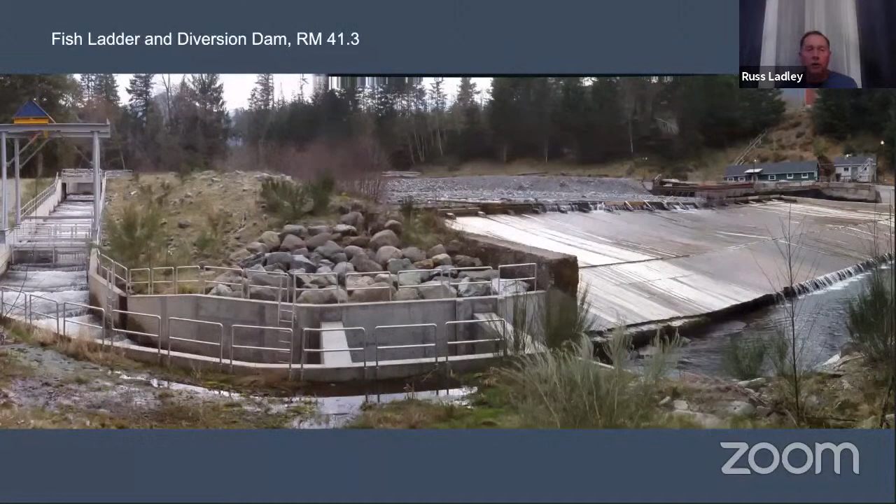So the timber crib structure you see to the right is the original dam design dating back to 1904. The fish ladder on the left was added in the year 2000 as a result of a settlement between the Puyallup Tribe and Puget Sound Energy, the original owner of the project. The project was since sold to Electron Hydro about 6 years ago. The elevation of the structure, by the way, is 1,600 feet.

It's surrounded by industrial forest land, in this case, mostly Hancock timberlands. It's not a place where you can take the family on a car ride and go see unless you have an access pass on private timberlands. And it's all through a maze of logging roads.

The diversion dam is just that. It serves to divert 400 cubic feet a second of water into this flume shown here, which then conveys that water 10.1 miles along the valley wall downstream. Next slide.

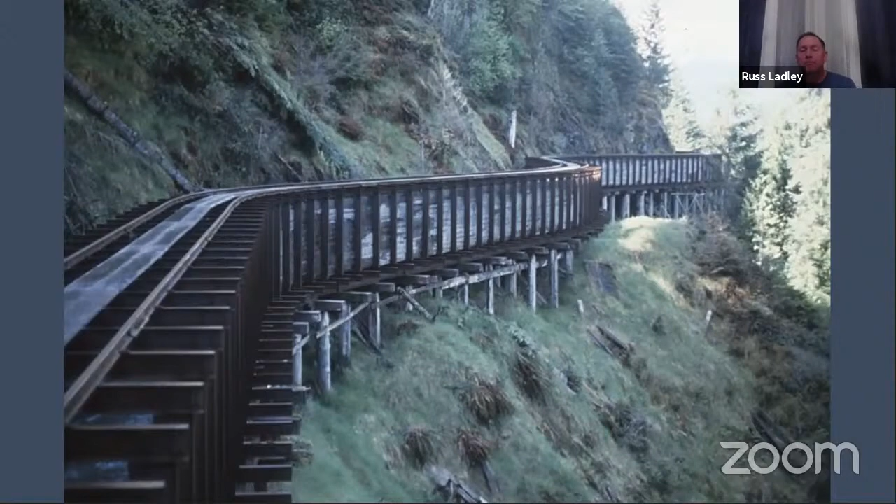Of course, when you're diverting 400 CFS from the river, you're also diverting all the fish in the river. The 400 CFS is about 78% of the flow of the Puyallup River at the point of diversion. The average flow is 525 CFS. Imagine trying to get a permit to divert 78% of a river today. Would not happen, especially a river with 3 listed species in it: bull trout, steelhead, and Chinook.

So anyway, the fish enter this, and since that settlement dating back to 1997, we've attempted to salvage those fish and safely take them downstream via this fish collection facility. It works, but it doesn't work well. We've done a number of tests. Puget Sound Energy also funded a test, and the success rate or survival rates vary markedly, anywhere from 5 to 80%. We know survival is a function of the diversion rate.

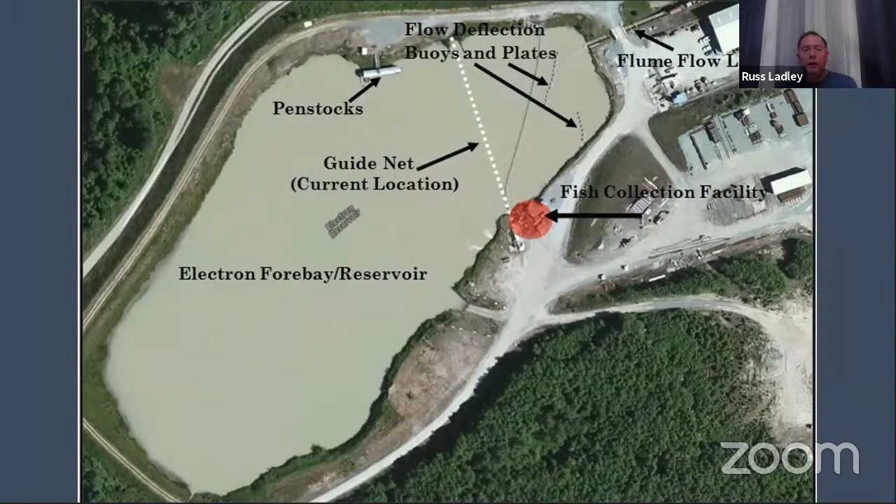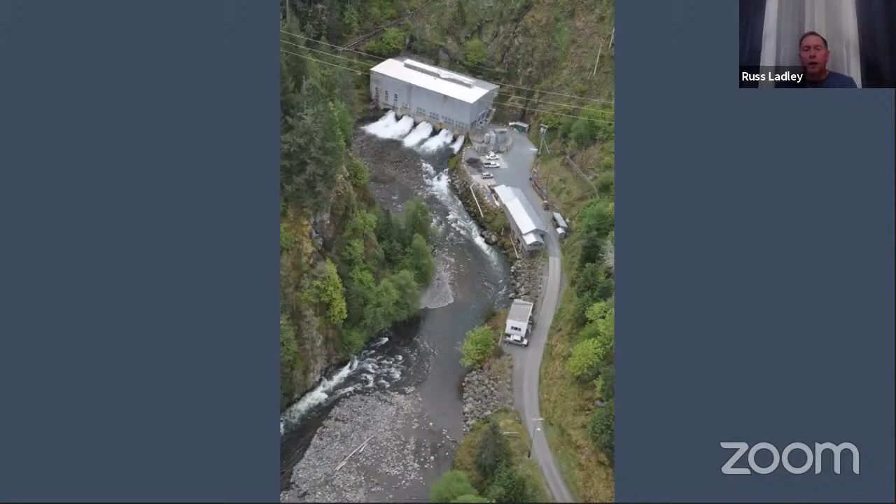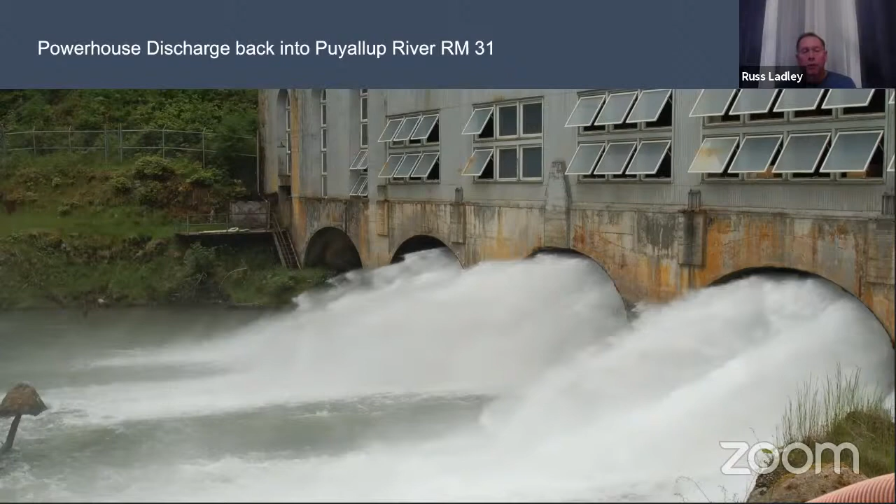You're looking at the discharge again. Fish can be attracted to this. Certain times of the year, you can see schools of salmon here. Oftentimes coho will wait for a freshet event before migrating upstream.

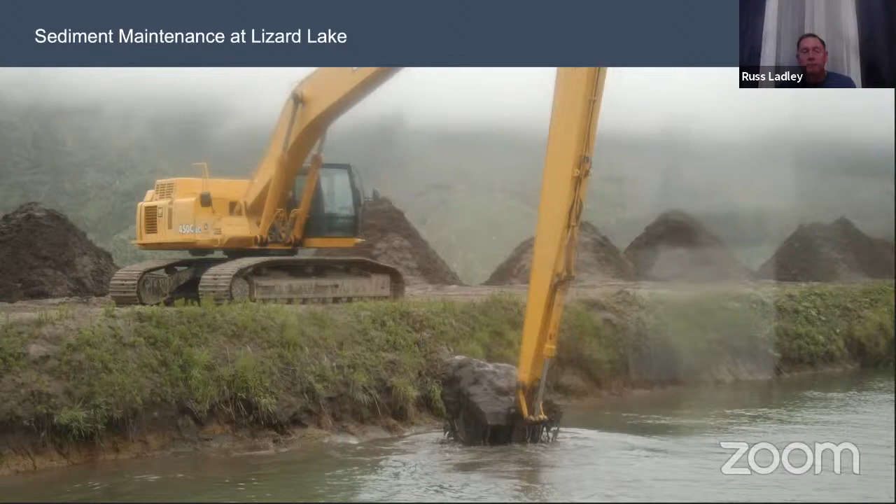Next slide. So those piles are then distributed in a storage yard with a very large bulldozer.

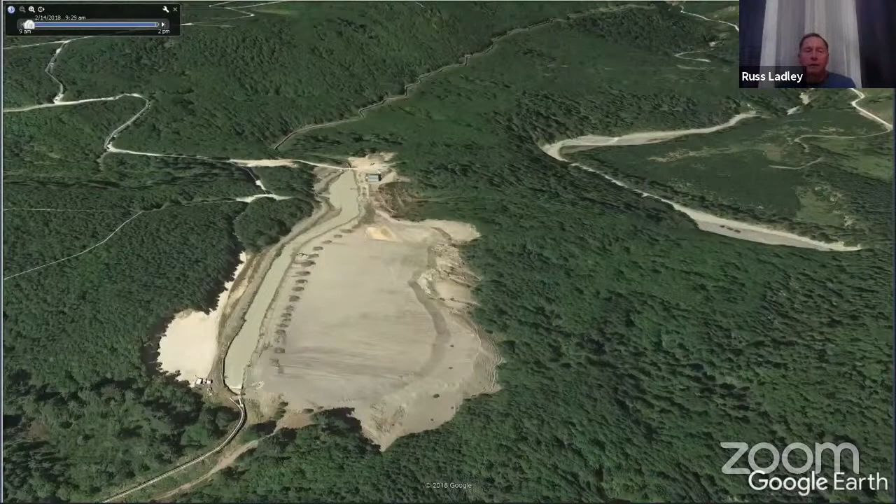That's the Puyallup River off to the right. Next slide.

Getting back to the forebay, we've wrestled with technologies trying to improve survival and catch as many of the fish that end up in the forebay as possible. But it's always a battle. The net used as a guide barrier tends to foul up—it can biofoul in the summer with algae, and after windstorms you get a lot of blowdown material, fine organics that collect on it. During periods of heavy sediment discharge, it can actually weigh down the net and fish get on the other side routinely. So that's part of the battle we've been facing.

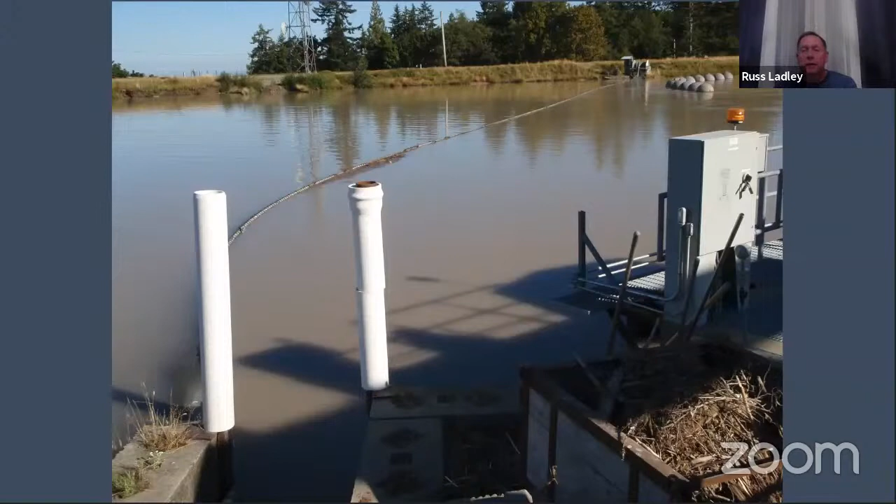Next slide. The net requires a staggering amount of maintenance depending upon the season and windstorms, but this is a device just used to clean it. They can use a water monitor, a high pressure hose, to clean it off, and then pull it back and forth along these spools so that you're using new pieces of net, similar to a purse seiner almost, while you clean another section.

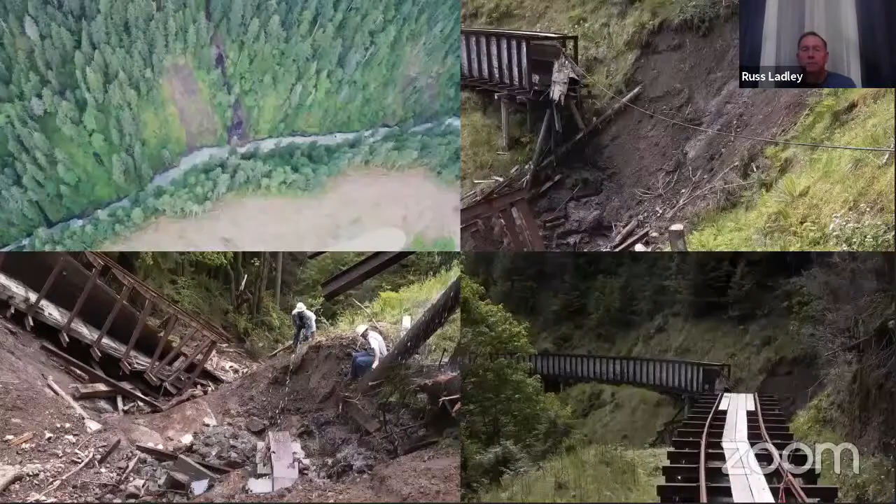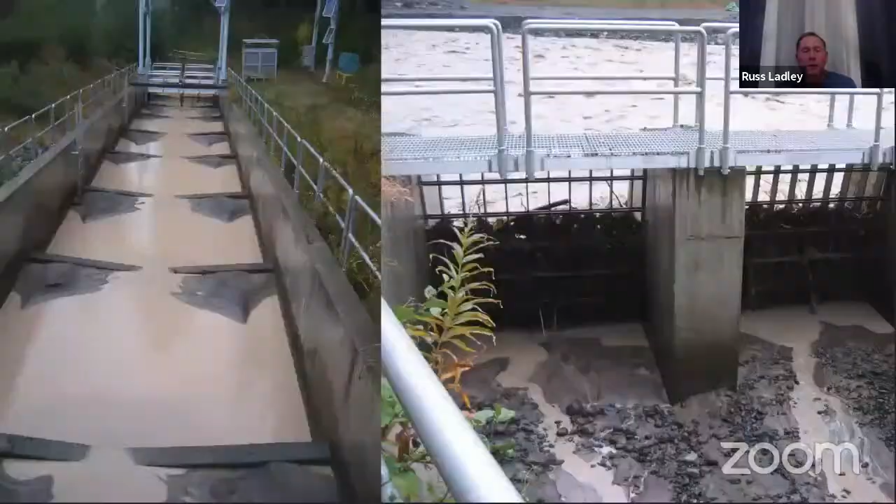As you can imagine, that steep section of the flume has to travel about 5 miles along the gorge length. Periodically you'll get slope failures—a tree will fall down, a large rock will come loose during a windstorm or a rain event—and it takes out the flume. At that point you have 400 CFS still moving through the flume, suddenly barreling down directly to the canyon below. When you fly the gorge, you can see the scars from flume breaks that date back over 100 years. It's pretty remarkable—obviously a very hazardous work environment if you're one of those people that has to do the maintenance.

Back to the fish ladder. It was designed to operate ideally with 10 to 50 cubic feet per second. It's a modified chevron weir structure, which basically provides fish passage without any sediment in the cells, or can act as a roughened channel when following a large flood event, for example.

The ladder becomes full of gravel and sediment, which is what you see here. In this case, the trash rack at the top of the fish ladder is blocked by organic debris and requires periodic maintenance. So we'll get up there, and the project owners also share the responsibility of ensuring water is flowing through that ladder. If there's no water flowing through the ladder, then there's no fish passage, and fish passage must be required. Next slide.

Here's the forebay penstock—they call it the raker shack. In front of the penstocks is a bar screen setup. The bars are spaced 1 inch apart.

Any fish less than 1 inch wide, which typically corresponds to a fish length of about 200 to 250 millimeters, 25 centimeters, depending on the species, can be lost to the penstocks. In other words, any fish smaller than a couple-year-old steelhead smolt can be pulled into that facility where they're running through a Pelton Wheel.

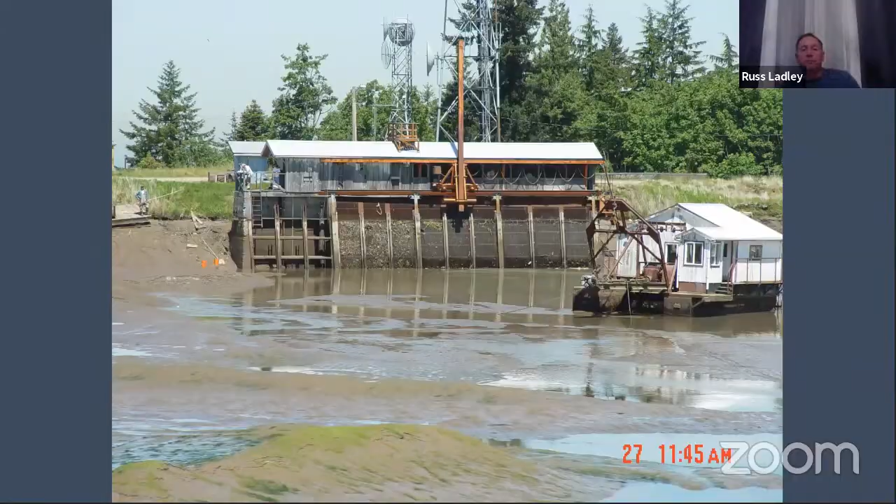Another view of the bar screens. You can see the liability of this design, allowing all small fish to simply pass through. Because of all the slime and sediment that deposits there, the work environment is brutal—collecting fish is a struggle. Unfortunately, most of the smaller fish get through, and you're left trying to salvage basically fish over 8 to 10 inches, which is what we end up with.

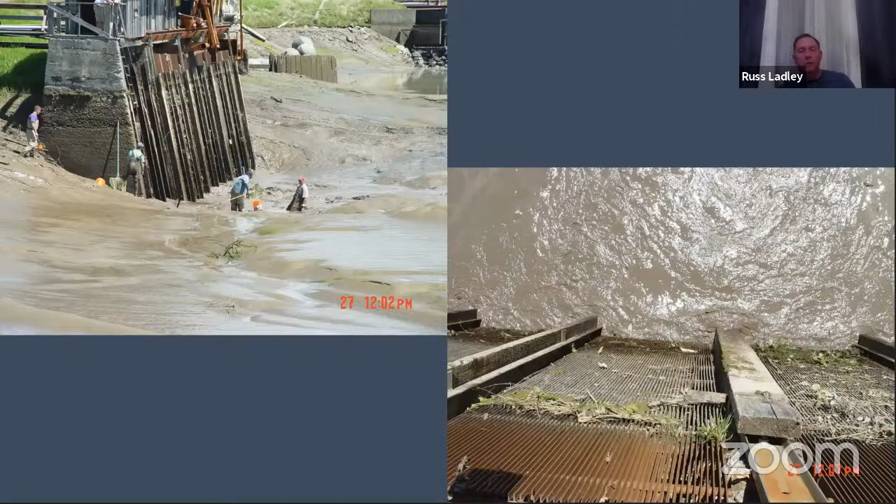In the case of Electron here, we have 873 feet of head. When the water exits that discharge nozzle, it's traveling at about 230 feet per second.

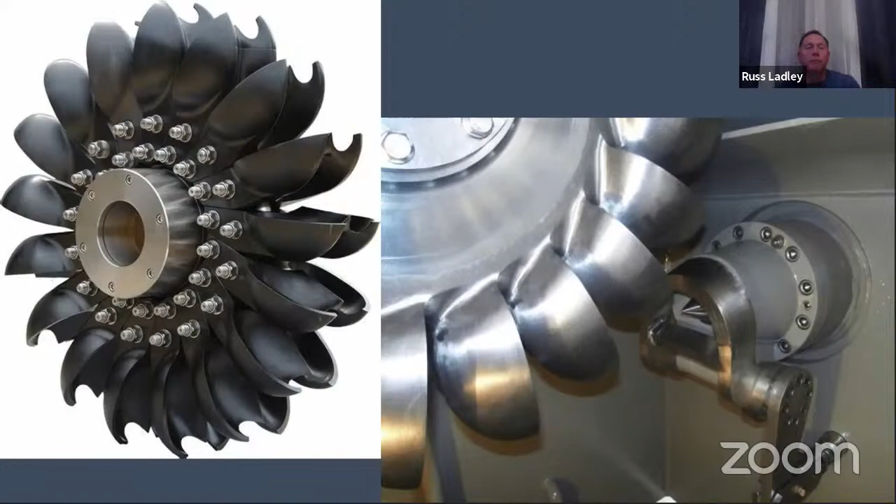I'm sure most of you have heard about improved survival of smolts at hydroelectric facilities. That's all well and good—it's a true fact, and a lot of improvements are coming online in the last 10 years. But just know, when you're talking about survival of fish through a hydroelectric facility, it's always in reference to either a Kaplan turbine system or a Francis, never a Pelton Wheel. The velocities associated with a Pelton Wheel system mean there's no survival—there's no way to survive that.

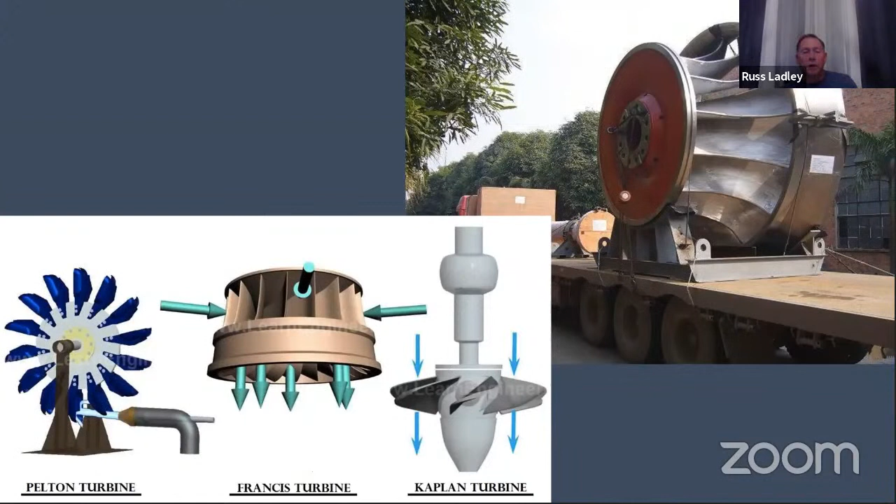The difference primarily is that water in a Kaplan or Francis is moving through the vanes, imparting energy through that movement, and the fish travel through around the blades—unlike a Pelton Wheel, where the nozzle is shooting directly into a steel blade.

So now I'm going to jump into what the current owner is doing at the site. They started back on July 15th with the work—that was the opening of the in-water work period. They'd actually submitted plans and designs for permitting back in 2016 to get the Corps permit, the county shorelines permit, and the state hydraulics permit.

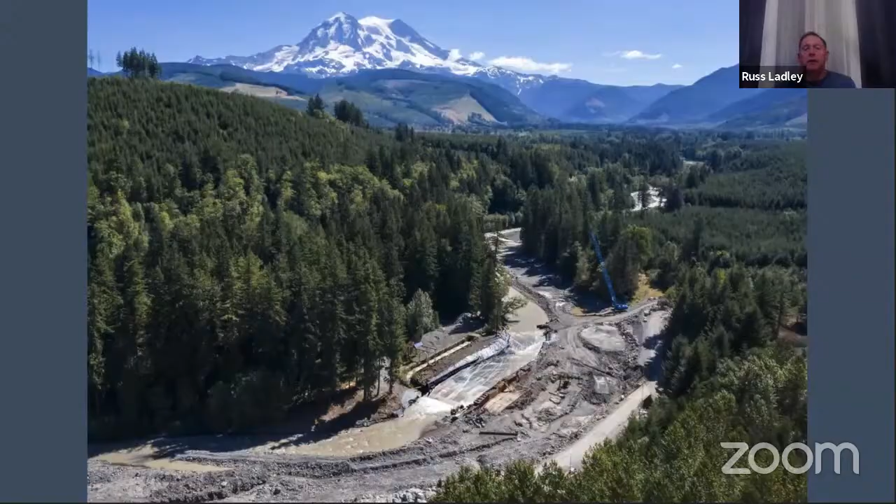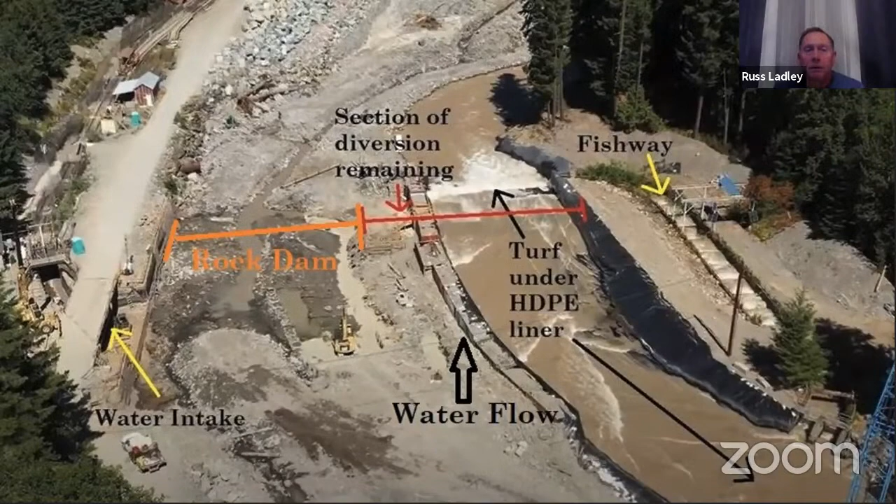For some reason, the owners decided to deviate from the plans approved by the permitting agencies. The use of connex boxes as a diversion structure was never mentioned, nor was the use of a high-density polyethylene liner, and certainly not the use of artificial turf as padding for that liner. Almost immediately after work commenced, they noticed the liner material and the padding underneath, the artificial turf, was tearing loose. That turf has crumb rubber elements in it to dissipate energy, and that material was also brought on site, mystifying everybody who learned about it.

Because it's fairly light, semi-buoyant, it was rapidly distributing downriver. A number of efforts were put forth to try to figure out just how fast this material was moving. Wherever you look downstream, you can find this if you look closely enough - it's almost the size of coffee grounds. Again, neutral buoyancy - most of it's probably in Commencement Bay by now, but if you look carefully on those sandbars or deposition areas along the river, you can still find the crumb rubber.

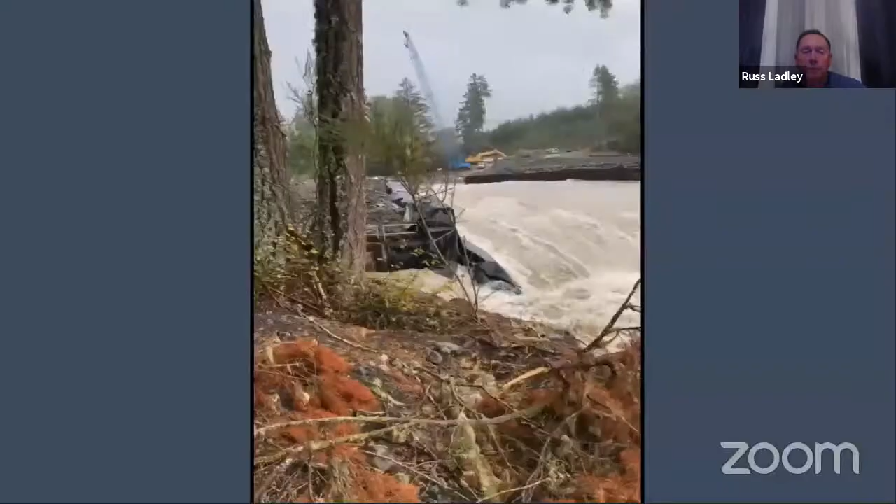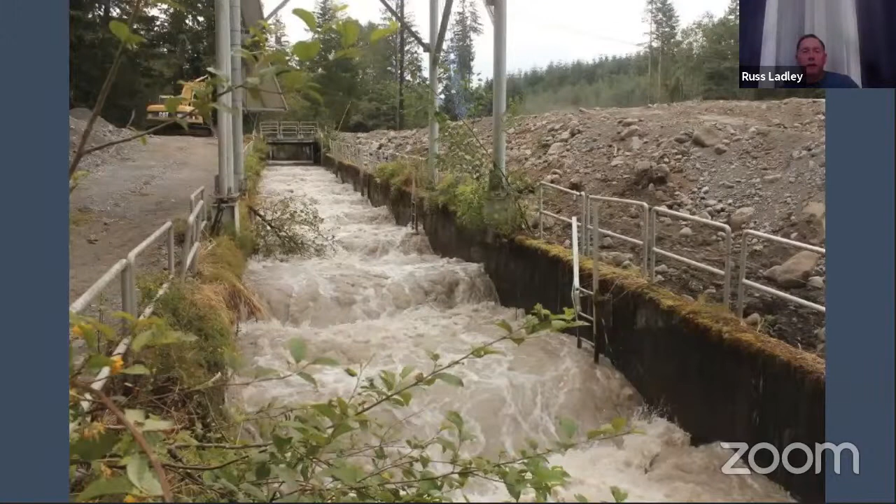A quick video showing the fish ladder entering below the dam. This is about a 1,500 cubic foot per second event, so a moderate rain event, but it highlights the problem fish would encounter trying to move upstream. Keep in mind this work period coincides with the return of Chinook salmon to the river. This is the fish ladder again with too much water in it, about 150 CFS we estimated.

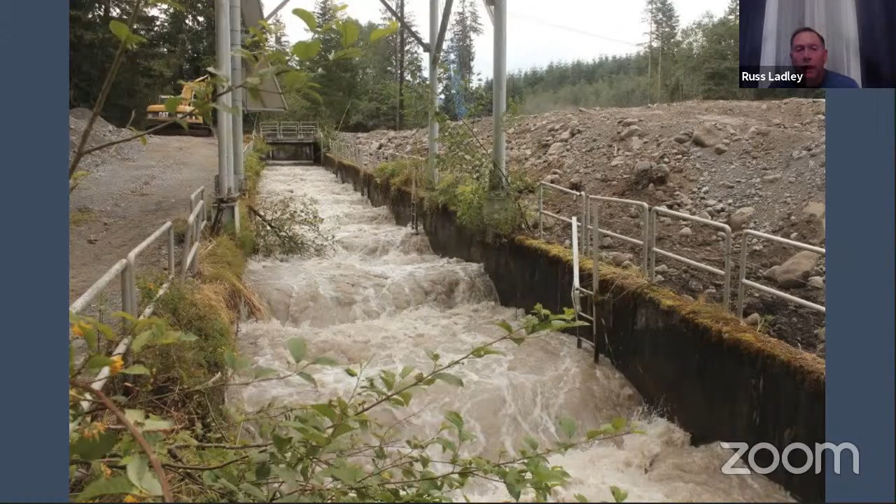The downside of this construction operation is that because of a variety of channel manipulations - unanticipated side effects of bringing the river to the right bank, and the turbulence created by that jetted water over the dam face - we believe there was no fish passage for a period of 8 to 10 weeks through the ladder, essentially blocking the entire fall Chinook return.

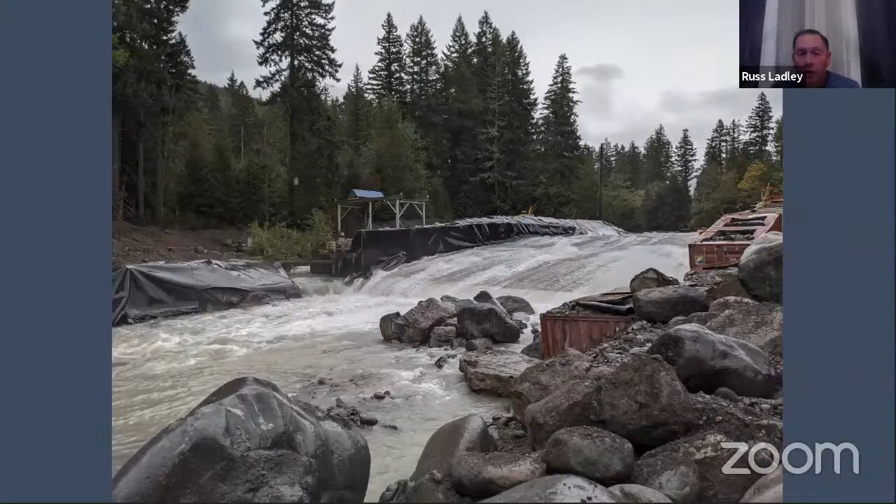Another shot at a lower, more moderate flow, probably about 800 CFS. The problem with this condition, though, is it's still about a 4-foot leap into that first cell of the fish ladder. For scale, that connex box, the rusty metal box, the lower one, is 8 feet in width. You can see those rocks - those are called jetty stone when they get that size, basically 1 rock per dump truck. There are hundreds and hundreds of these used in the construction of this site just to try to stabilize it.

This again is a slightly higher flow condition, probably about 1,500 CFS. You can see the violent maelstrom created at the intersection of the fish ladder on the far left, actually blocked by the dirt pile here, meeting the flow of the river. And then some of the HDPE, that plastic liner used to isolate, was constantly being torn off for the duration of this construction period. We've spent a number of days looking around downstream, finding bits and pieces of this material scattered for miles now.

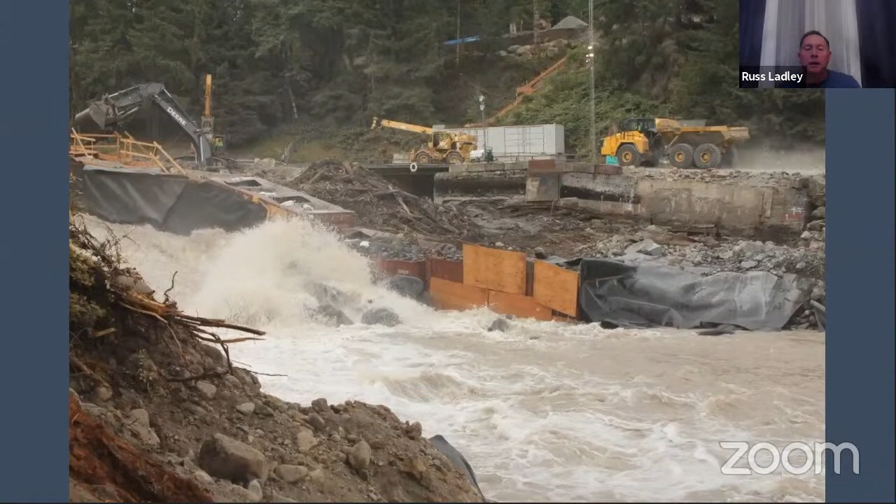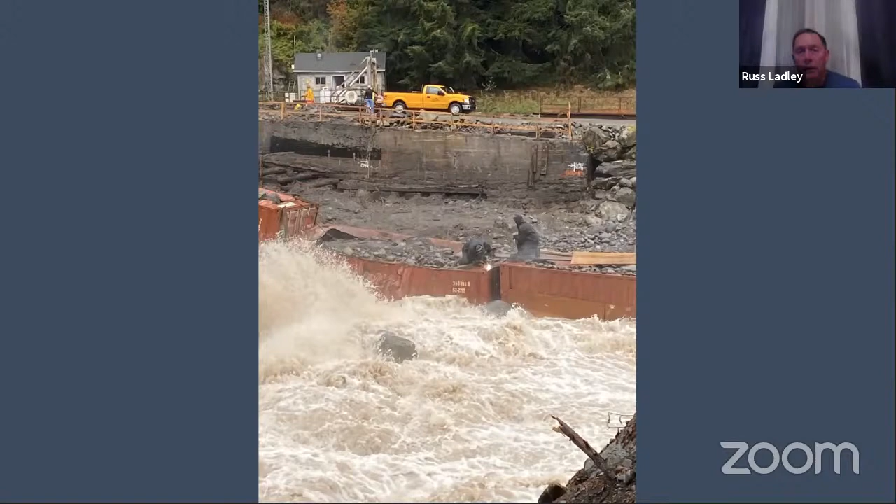In this case, the connex boxes were actually shifting, and the workers had to come out and try to weld them together to keep them from moving. There's an incredible amount of force associated with this - even though it's only a 12-foot drop and about 1,500 CFS, stream flow velocities here are approaching 18 feet per second. So that's very energetic.

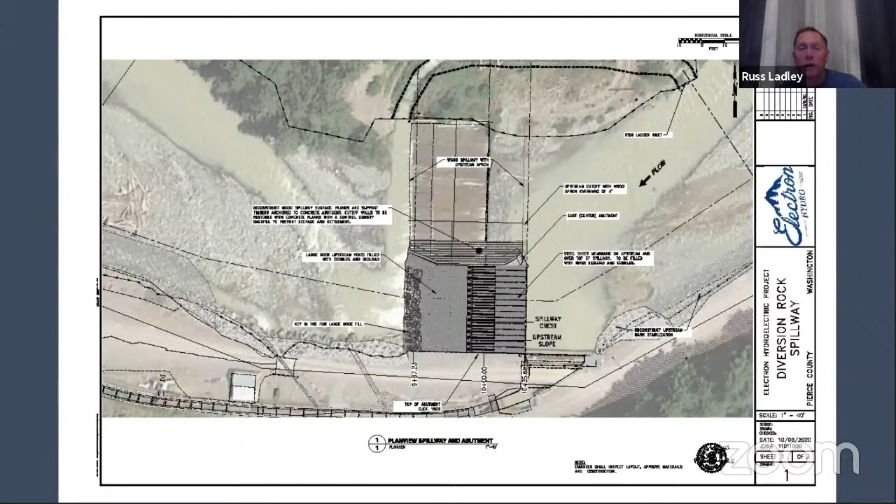So this was what was proposed as part of the initial permit package submitted to the agencies and the tribe for review back in 2016. The timber crib structure at the top of the dam remains in place. A center wall is going to be poured in the middle of the river channel, and then a new concrete foundation to support the air bladder dam. And then all the accessory work to basically dry out the site, allow for footing installation, rebar forms, and all that kind of work associated with putting lots of concrete in the river.

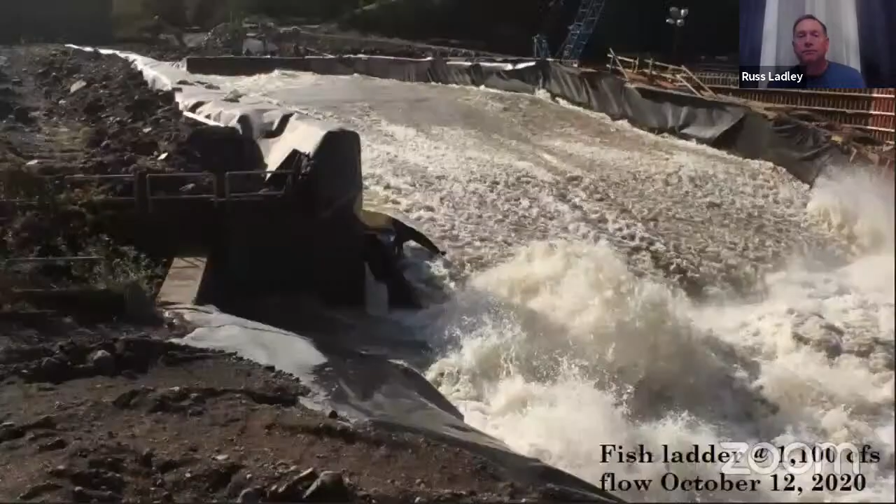Next slide. So later in the season, we're getting antsy about the delay in fish passage, and still the environment for fish passage is just not conducive. When you design a fish ladder, you need to provide an attraction flow to get fish to the start of the ladder, you have to provide for a jump height that fish can make, and you also have to allow the fish to stage that jump, in other words, prepare and get the right velocity in the jump to move upstream. Clearly, none of those conditions is afforded under these conditions.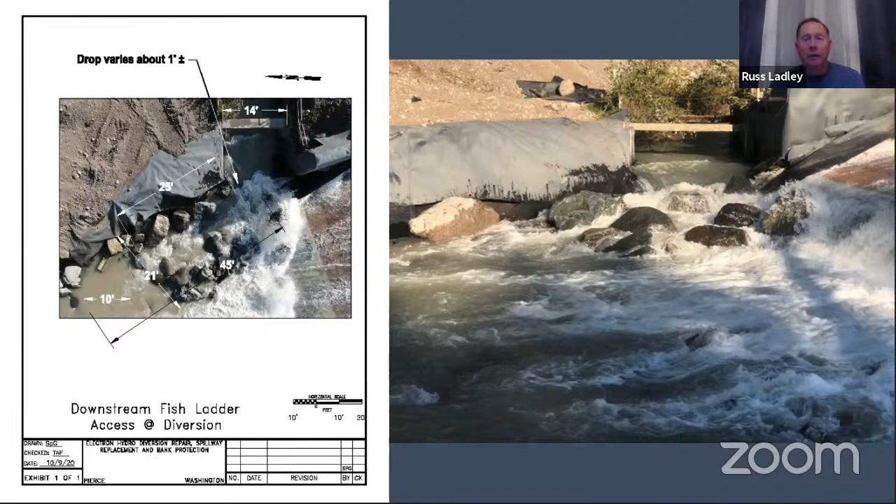Next slide. This is an aerial view. So we went back and forth with the agency fish passage engineers, arguing about how best to improve the situation, try to diminish some of that flow velocity and allow fish a better access environment. A number of different efforts were tried, mostly involving moving large pieces of rock around in different configurations. This is slightly improved, but the jump is still too much, the velocities are still too high. And in all likelihood, this won't remain following a high flow event that pushes those rocks out of the way.

Next slide. So getting back to the original permit submittal package, what you see in blue was part of that original 2016 design. Once the county and the Army Corps of Engineers issued a stop work order because of violations to the permits, which was early September, the owners came back with a different plan, knowing they weren't going to be able to get all the work done by the September 15th cutoff date.

So they came up with this plan to develop essentially a roughened channel at the site to allow work to commence the following summer, next July 2021, and stabilize the site for the winter. This involved placement of 8,500 yards of jetty stone, 6-man rock, as it's called out here. That's all shown in red.

So keep in mind, this is what has occurred, yet there were no permits issued for it—no 404, no hydraulics permit, no shorelines. The structure is in place today, and it's a structure without precedence anywhere in the Northwest. Our concern primarily is how fish respond to this now that it's here. The initial concern is downstream migrating smolts—what's their fate if they enter the voids between the large rocks? How much water is going to be moving through them to attract adults through this false passage, because they're not going to be able to make it past it. You'll see that in the forthcoming slides.

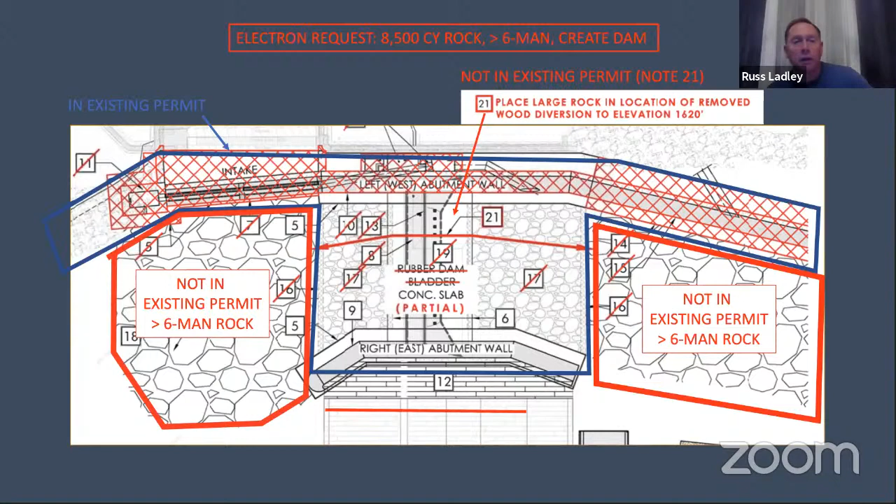Next slide. This is a side profile of it. The green structure would be the top of the air bladder dam once it's installed. The rock structure intended to winterize essentially reaches the same elevation, that key elevation of 1,620 feet, which is designed to ensure they can go back to diversion and generation, and of course that means revenue generation throughout the winter.

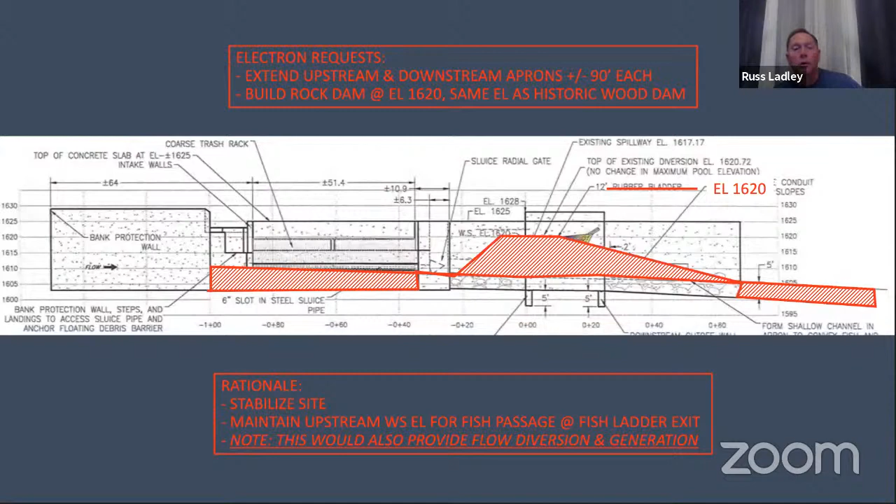Next slide. Let's give you a better indication of what that air bladder will look like. The idea here is that rather than moving all that sediment into the flume where it's a total liability, the material will naturally build up behind the dam. They can deflate it and it'll just wash downstream. It's apparently a pretty robust rubber dam.

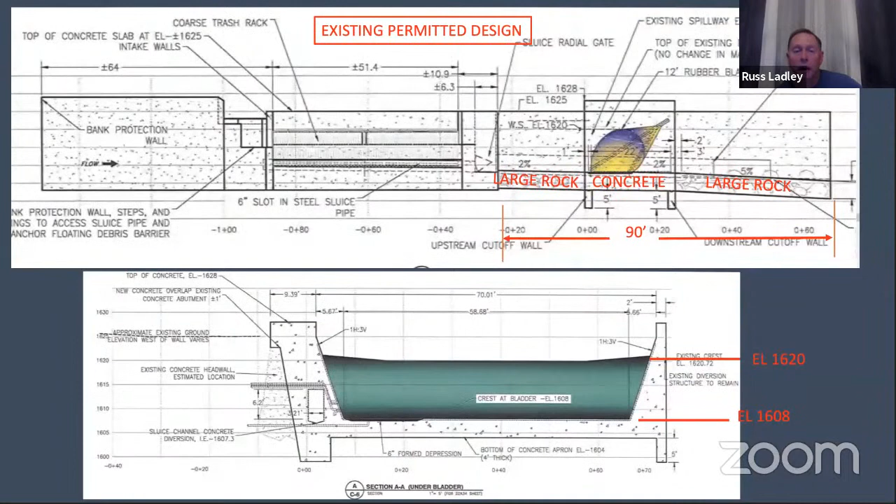It would have to be, because keep in mind, we're going to be recruiting large old growth trees from Mount Rainier National Park, which will come sailing through this at high flows and floods, and I suspect dragging a big root ball behind them. So whether that rubber can stand up to that force and impact, time will tell. Next slide.

Again, this is what's in place today. All those voids created by the large rock, the water moving through it, it's very concerning to us. And unfortunately, there's no requirements to test it and see how fish of all age classes will respond. It's a complete unknown.

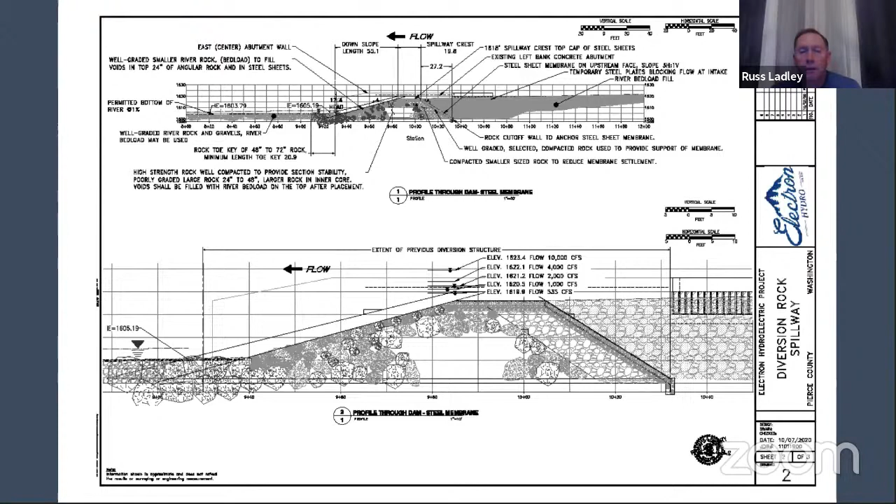A summary of what we've got now. Construction of the left bank and center pier is complete. No fines have been levied by the regulatory agencies, the permitters, as a result of permit deviations. I mentioned before that the 4 permits in hand all were violated. That includes the Section 401, 404 with the Corps, county shorelines, and the state hydraulics code. Still no Section 404 permit in hand to construct this dam that's now complete and in place.

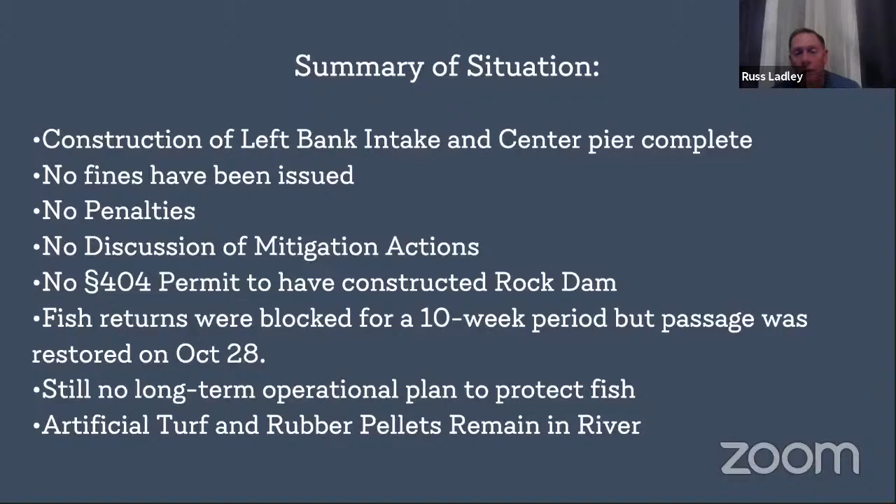We believe that fish returns were blocked for a 10-week period ending October 28th, when all in-water work was to cease. The owners did abide by that, got it all done by October 28th. Now we have a structure in place that we frankly have no idea how fish are going to respond to. And we also have a lot of artificial turf and rubber pellets still in the river, as well as the HDPE liner that's drifted downstream.

So what has actually been done since the last 2 weeks of October? Well, water was restored to the original channel shown here. That's a roughened channel. It's hard to get a sense of scale here, but that is actually a 12-foot drop over about 100 feet of run. So it's a steep river environment.

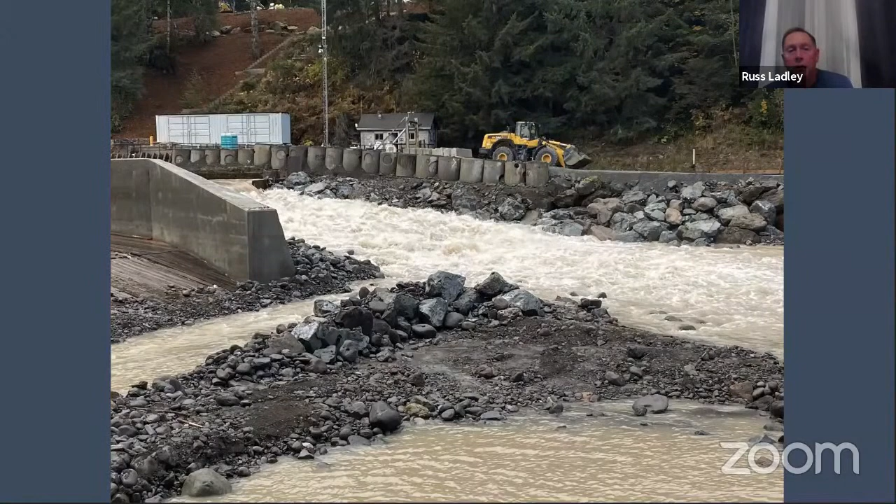This is the sheet pile wall, also that was not called out as part of the design. It goes down about 25 feet below grade level there. So it's not going anywhere, but unfortunately it's just oxyacetylene cut, so it's a very rough edge. In all likelihood, there's going to be a hydraulic pillowing, so fish will not make contact to it.

Our concern at this point is what is the fate of those juveniles when they go back to diversion and you just get a little bit of water kind of cresting and dribbling over the top of that sheet pile into that rock, roughened channel downstream of it. Again, no tests, no monitoring required at this point. And just another angle of the sheet pile there.

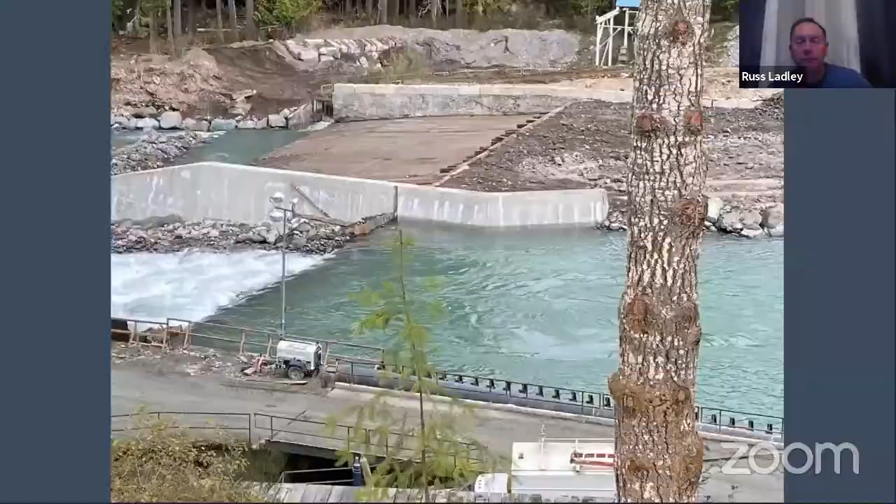So this is what it looks like when it's watered up. The fish passage engineers are kind of going back and forth as to whether it's even passable for steelhead or bull trout. I personally don't think they can make that run. Even if they got to the edge of the sheet pile, there's simply not an adequate staging area to make a jump. So they are reliant upon the fish ladder again, which would be fine except for the fact that most of the water is on the opposite side of the river channel.

So how many fish are likely to find the entrance to the fish ladder on that far bank? You can see it over there. Again, you're right back to the situation we had at Buckley for decades, where fish are being attracted to the wrong portion of a dam.

In all likelihood, some fish will find it through trial and error, but keep in mind that those fish are programmed to get from point A to point B in a certain period of time. And if they're wasting time and energy and exhausting themselves by being attracted to a location where they can't make safe passage, then that will impact their survival and their ability to reproduce successfully.

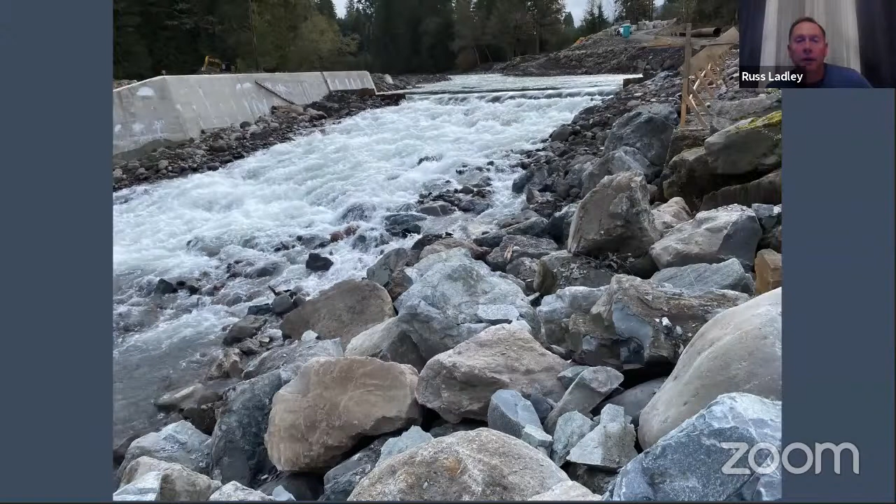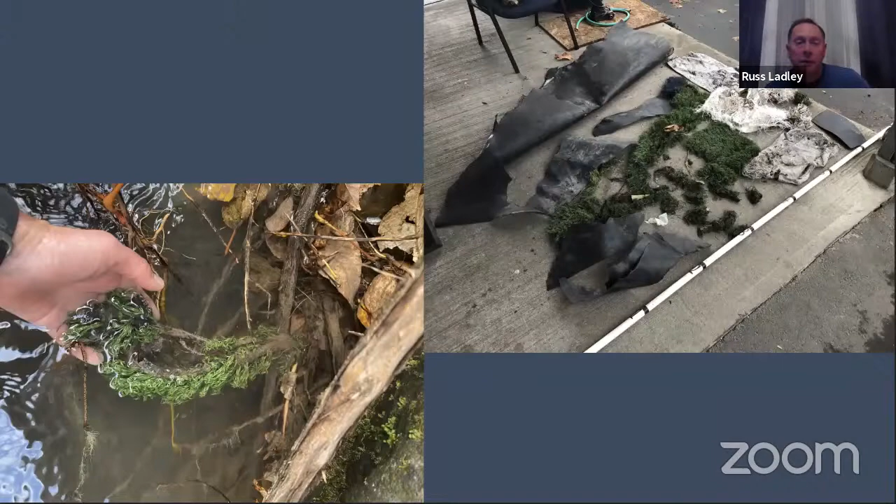So that's the show, folks.